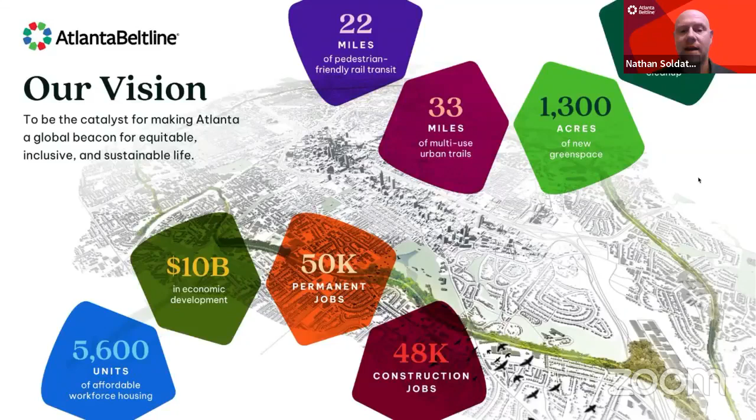So all these elements make up the Atlanta Beltline project. I'm glad you guys could take a quick walk with me along the Beltline and learn about the full portfolio project. But at this time, I would like to hand things over to Shaun Green. He's our principal engineer and also the project manager for the Beltline Transit Study. Mr. Green?

Thanks, Nate. Good evening, everybody. Thanks for joining us tonight. I want to give a brief overview of what it is that we're going to talk about, and then we'll get into some details specific to the Northwest, and then specific to the Southwest and Southeast as well.

Overall, the transit vision for the Atlanta Beltline is about creating equitable and sustainable solutions for access and mobility, transportation, as well as economics. So regardless of weather, regardless of wealth, regardless of geography, and regardless of ability, everybody will be able to make use of the Atlanta Beltline corridor with the transit program as we are envisioning it.

It adds to the already amazingly successful trail program that we have, and we'll be able to provide a lot more in the way of mobility for people that live on one side of town and are trying to get to the other side. So next slide, please.

The big picture here is our study area is looking at the Northwest, the Southwest, and the Southeast. The Northeast quadrant of the city had a transit study done by MARTA roughly 2 years ago. The purpose of what we're talking about tonight is to look at the balance of the Beltline loop, and to really focus in on the Northwest for the purposes of finding a viable, feasible, high-performing transit alignment between Bankhead and Lindbergh MARTA stations.

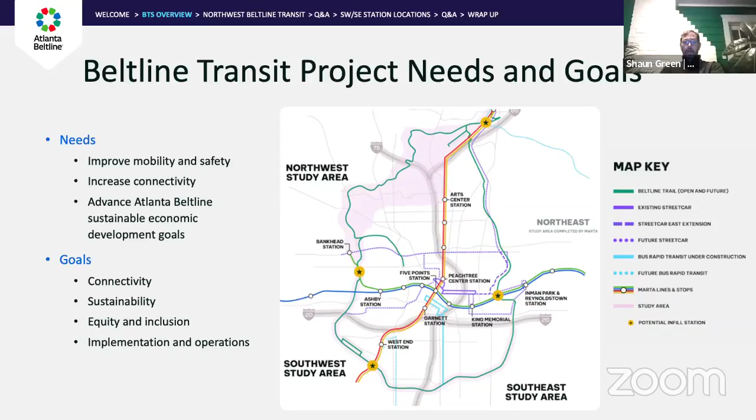Next slide, please. In the typical transit planning process, we are well into the preliminary planning element of it. We have the idea as to what we're trying to do. There's been a lot of work over the course of the last almost 20 years, but the last real deep dive in looking at the Beltline system-wide as a 22-mile loop was done about 12 years ago.

So it was time to dust that off and rethink through some of the assumptions. Really what we're doing with this alternatives analysis is we're trying to define the project in terms of what is the route, what is the alignment that's going to take, what are the stations that we're going to end up with. And then when we have all of that nailed down at the end of this process, we'll be able to hand MARTA a lot of deliverables, a lot of documentation, and then they can start to define the how, which is what happens with the design work that would follow before they get into construction and then operations and maintenance.

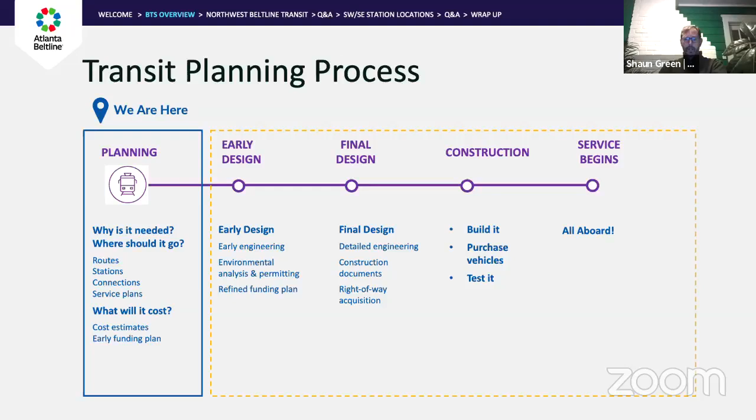So the next slide, please. Our partners in this, MARTA and the City of Atlanta, are working pretty tightly, not only in general, but also specific to this transit plan. MARTA is the transit plan implementer and operator for the City of Atlanta.

That hopefully is pretty apparent to everybody with the heavy rail and the bus system, and then the More MARTA program of projects, which is the half penny sales tax for 40 years. And then the city of Atlanta obviously stood up the Atlanta Beltline program of projects with our organization with enabling legislation in 2005. Currently, the city is the representing entity of the voters who are paying the sales tax for the MARTA high capacity transit projects that are envisioned. So on behalf of the city, Atlanta Beltline is the implementation agent.

And we have lots of other partners, as Nate mentioned as well. MARTA is our transit partner, just like Path Foundation is one of our trail partners, or Trees Atlanta is our arboretum partner, and we've got plenty of housing partners as well. So this falls well within the standard setup that we have for trying to get all of these programs that we are responsible for delivered through our partners and with our partners. Next slide, please.

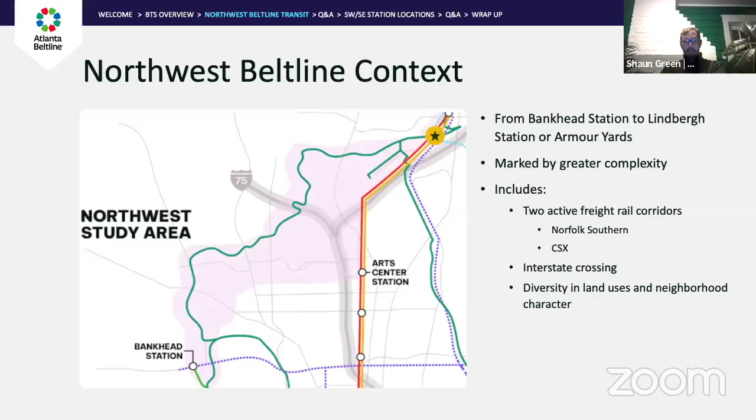Back to the goals - you can again see connectivity, sustainability, and equity. Those are the three outward-facing goals. And then we have our inward-facing goal with respect to operations and implementation. So ultimately, we are screening against these goals and objectives with some performance metrics that we'll talk about in the next couple of slides.

In terms of process, the Beltline was stood up in 2005. The last big look at transit Beltline-wide was in 2012. There'd been other work since done, but looking at it holistically and really digging into the Northwest to come up with viable alternatives. Ultimately, of those viable alternatives, one will float to the top and perform higher than the others - that's the one we're looking for as we go through these analyses. That one that floats to the top is probably going to be our locally preferred alignment, our locally preferred alternative, which can then be handed off to MARTA for starting up the NEPA environmental process.

NEPA is an acronym, it stands for National Environmental Policy Act. It's a federal umbrella law that incorporates all kinds of other environmental laws. It was signed in 1970. Basically, whenever the federal government spends federal money on projects, there has to be an environmental document that documents the process and decision making to get to the final conclusion. So we're in the alternatives analysis step right now, trying to get to an LPA, a locally preferred alternative, and then with that LPA, the environmental process will follow.

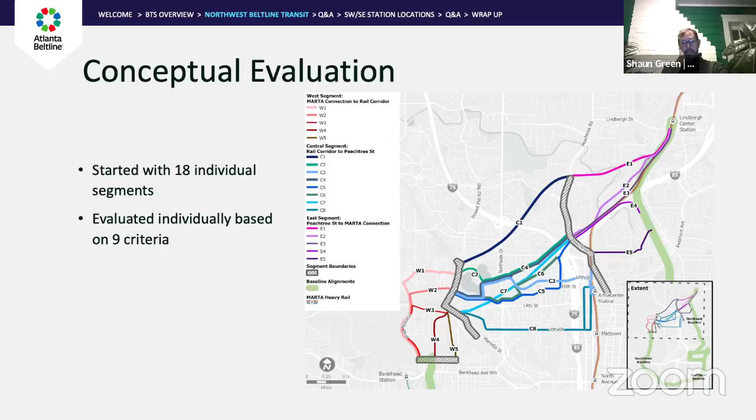And those 18 segments are all screened against a set of 9 criteria. We'll go through that on the next slide.

Engineering feasibility and right-of-way ownership get at the inward-facing goals of operability - I keep making up that word, but I'm going to keep using it, see if it sticks. We wanted to make sure that what we're coming up with makes sense and is physically possible to actually operate.

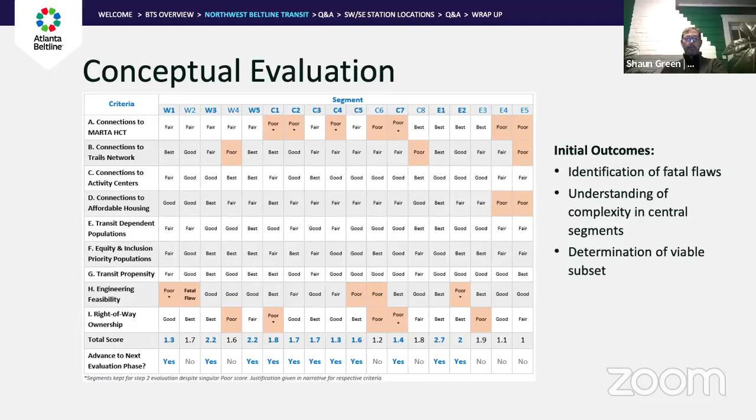You can see if you go to W2, the second segment at the top, and follow it down to engineering feasibility, there's a fatal flaw. The total grade change for a section of W2 was well beyond what any transit vehicle could achieve - making up a number, let's say it was like 18 to 20%, and the maximum grade vehicles can really do for even a short stretch is say 7 or 8%. So that segment was screened out because of that fatal flaw. We'll go through these with some maps over the next couple slides.

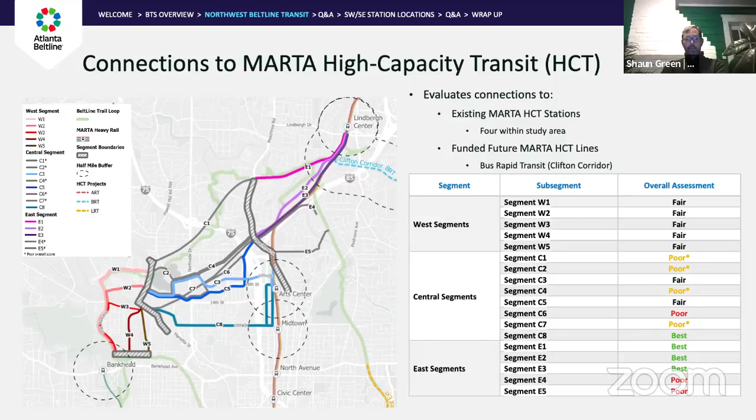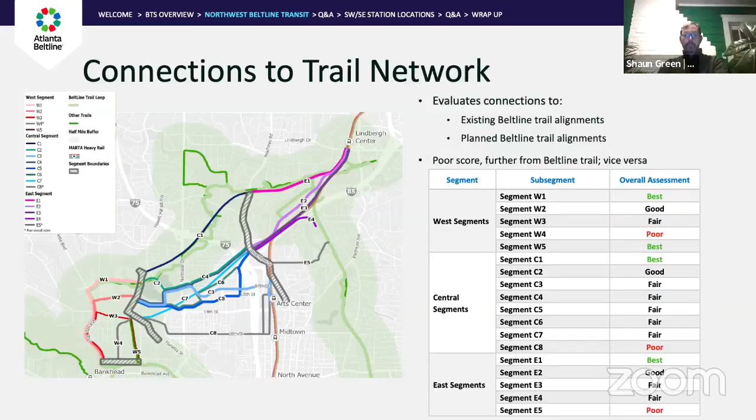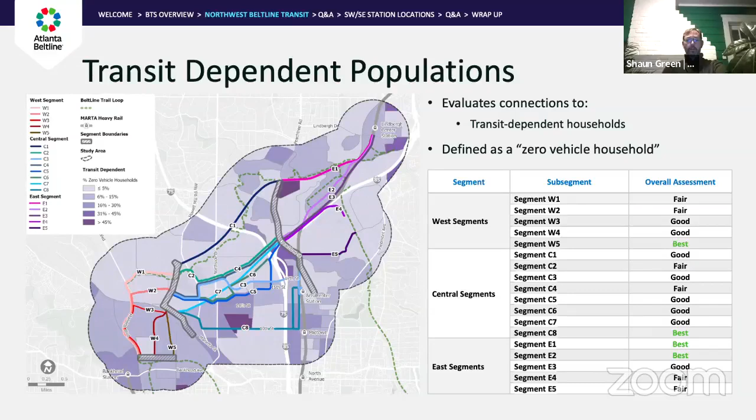Transit dependent populations, we define as 0 vehicle households, information gleaned from census data. The darker the purple within the study area represents a higher percentage of 0 vehicle households. The closer the transit segment is to the darker purple communities, the higher it scores than segments farther away.

Similarly, transit propensity is defined as a combination of low-income households and senior populations. In green, the darker it is, the higher percentage of low-income households, and the darker blue represents a higher percentage of population 65 and older. Where those overlap, the darkest color—a green gray—represents the highest percentage of population that is both low income and senior.

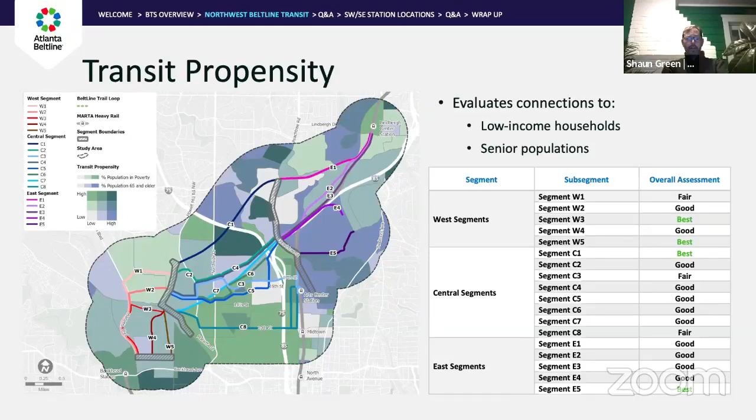So again, it's all about proximity. The transit segments closer to the darker areas within the study area score higher than the segments farther away.

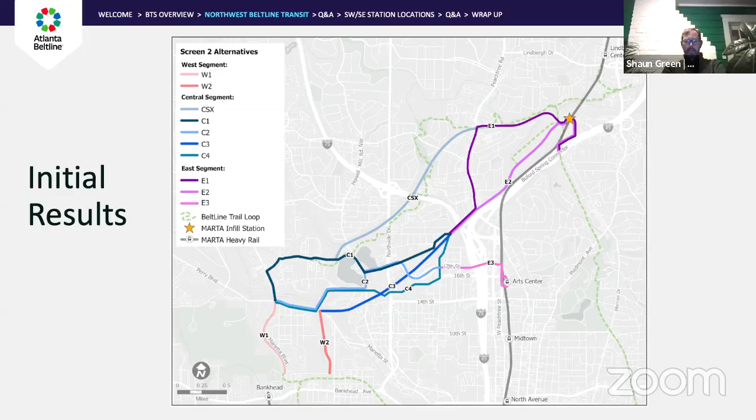From the segments that floated to the top in that first screen, we've taken those and turned them into continuous transit corridors that link up the Bankhead area to the Lindbergh area.

Alternative 1, the red line, generally follows the CSX corridor. The light blue and green alternatives come from the Norfolk Southern corridor, then get into the Peachtree Road corridor to go up towards the CSX corridor and continue east along CSX.

The purple and dark blue alternatives stay in the Norfolk Southern corridor and end up serving the Armour-Ottley area, making use of Norfolk Southern and some Georgia DOT right of way over there. That's a high level explanation of what these 5 corridor alternatives are set up to serve.

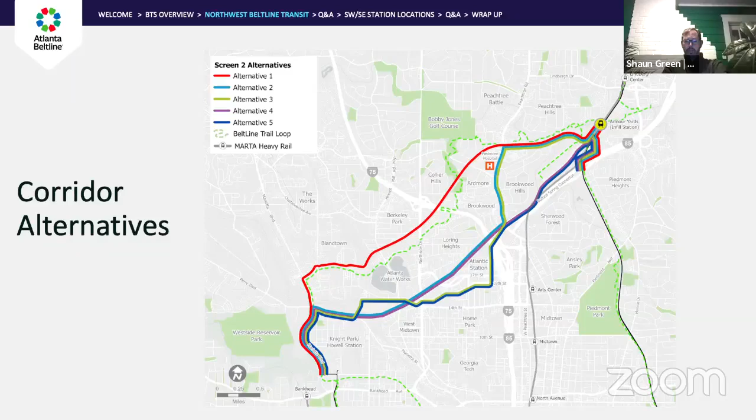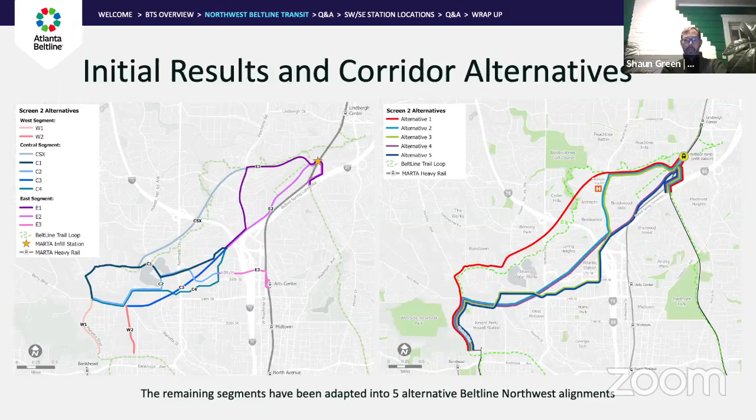You can see the initial results from the segment analyses and screening before, and how we turned those sections and segments into continuous corridors.

We came up with preliminary station locations for each alignment, based on existing zoning and future land use, with future land use getting at population and employment density. That future land use comes from the City of Atlanta Comprehensive Development Plan.

We also looked at social vulnerability, trying to ensure stations would be in close proximity to population centers with seniors, low income residents, or zero car households, while also wanting to be as adjacent as possible to activity centers and employment centers.

Piedmont Hospital, for example, is I think the largest employment center within the Beltline planning area, so that's a great target to try to serve with transit. Atlantic Station, as an activity, housing, and job center, is still probably only 60% built out with another 40% to go, so there's a lot of existing and future density there that makes sense to serve.

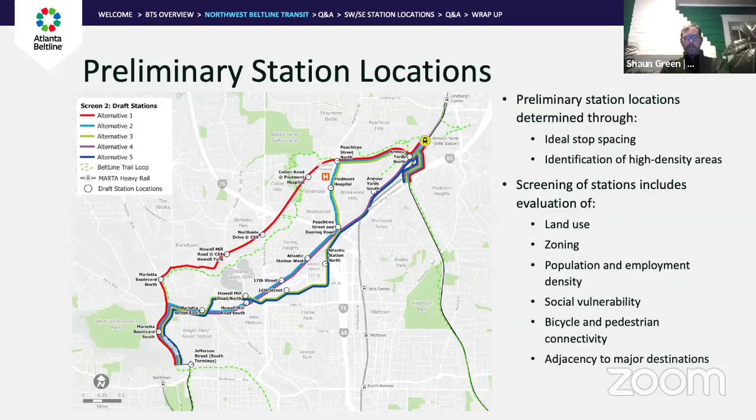There's a lot of very interesting analyses we've got going on right now, trying to sort out which corridors perform higher than others. That's an ongoing set of analyses we'll be able to report out on at the beginning of the coming year.

So what's next for the Northwest? If we can hit that next slide.

Ultimately, what we're doing is we're doing the analyses for the stations to see how they're performing in terms of ridership. We're going to be looking from a corridor perspective at the capital and operation and maintenance costs. We'll also be looking at the corridor level in terms of environmental impacts, whether it's ecological, social, or cultural. We'll be looking at those at a high level as well.

And then where we do have in-street running, we'll look at what kind of transportation impacts we will have on the existing system. Each one of these 5 alignments would be a great alignment for transit within the city.

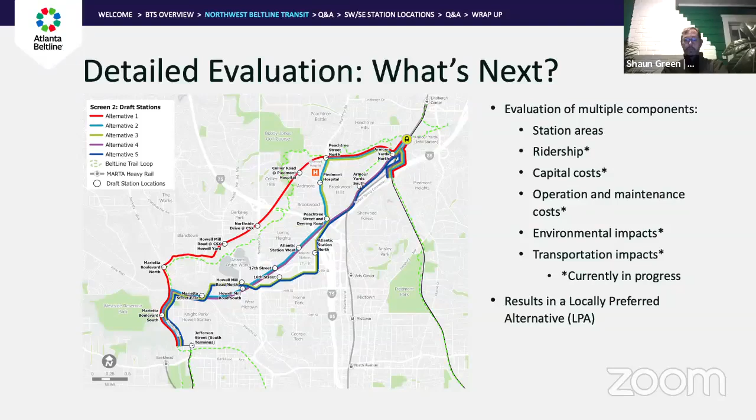We're really only going to be able to pick one of them. So we, as a collective city, are going to have to make some decisions with the data sets that we're providing at the end of this study and ultimately pick a locally preferred alternative for the Northwest.

So with that, we'll go into the Mentimeter, which is a survey tool. So if you're on a laptop and you have your phone, you can grab a QR code here and get into the Mentimeter website.

If you just want to use your laptop or your phone without the QR code, you can go to menti.com and enter the code 5968843. That will link you into this Beltline meeting in terms of the Mentimeter code, because we've got a couple polling questions that we want to ask.

And so here comes the first question. Dun dun dun. And I apologize, folks, I'm fighting a cold, so I'll be drinking a lot of water tonight to keep the voice going.

So this is a prioritizing question. Basically, the question is, what criteria or factors are most important when considering alignments or routes and station locations for transit? So what we want you to do is rank these 7 by importance. Your most important would be moved to the top, and your least important of the 7 moves to the bottom. We'll give you guys a couple minutes to think about this and organize your thoughts.

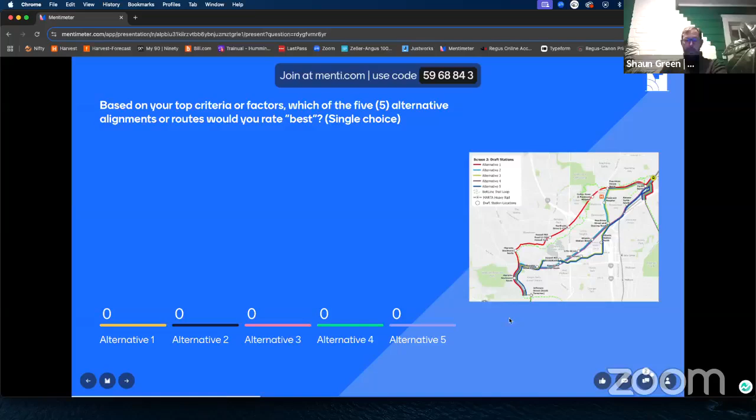Sorry, the colors in Menti don't line up with the colors on our map. Alex, if you can go back into the slide deck and share the last map in the Northwest.

That way it's a little bit bigger and everybody can take a look at it. But I'll need your help, Alex, because if that map is up on the screen, I can't see the Menti. Well, maybe I can find it on my phone.

So alignment or alternative one is the red alternative. That's generally CSX. The other alternatives are generally using Norfolk Southern, and in addition, alternative three and alternative two are also using Peachtree Road, Peachtree Street, Peachtree Road.

And then alternatives four and five follow Norfolk Southern all the way through Armour Ottley up towards Lindbergh.

Alex, if you don't mind, can you tell me how many people have voted in the Menti? I don't want to submit and skew anything.

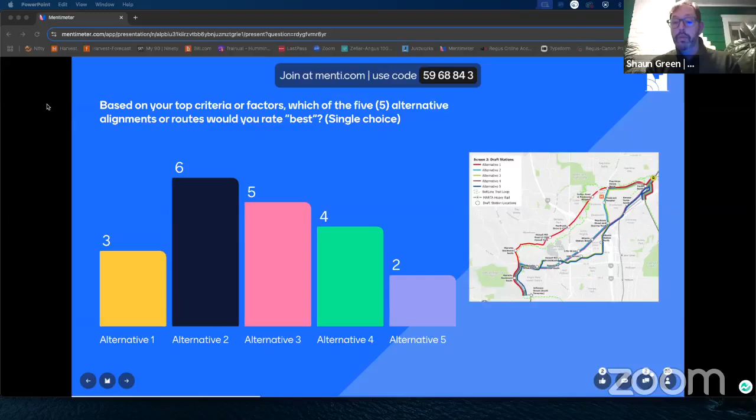Oh good, so we got 20 participants there. So what we have is three people with alternative one, the CSX corridor, six people with alternative two, which is the light blue corridor that runs Norfolk Southern and Peachtree. Then we've got five people looking at the third alternative, four people looking at alternative four, and two people looking at alternative five.

So I think that's 20 out of 30, 29. Yeah, I think we'll call that close enough in terms of a percentage of the population that participated, and move on. Is there another Menti or are we going back to the presentation?

Excellent. So what we're going to do right now is a section of Q&A specific to the Northwest, while it's kind of fresh in your head.

You can go ahead, Nate. Yeah, Shaun, I got this. Why don't you grab a drink? I think you've given this presentation four times already this week. So today, all right, we're going to break things up a little bit.

So we're going to address a few questions. We have a nice small group, we have some folks on Zoom. I'm thinking if we have any phone attendees at this time, but we do have Facebook Live.

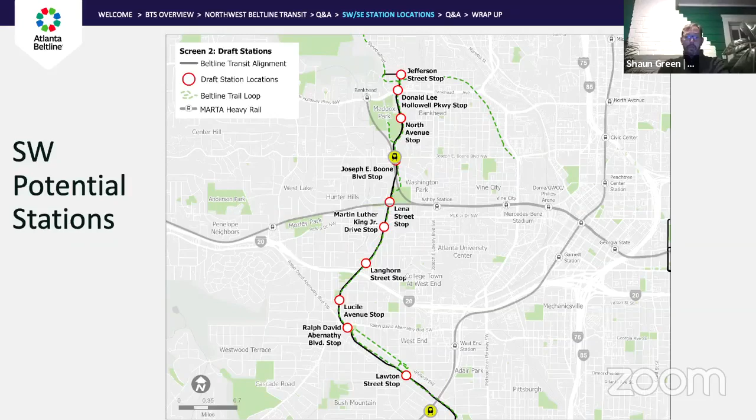On the next slide we have the Southwest potential stations. You can see there's a lot of them.

When you're laying out transit 10, 12, 15 years ago, the conventional wisdom at the time was to make it as accessible as possible—put as many stations in so people can walk up to it. The problem is if you're trying to go a distance on that train, you end up having a stop every quarter of a mile, so your travel time ends up being long as a result. So what we've done here is challenge that conventional wisdom and started looking at whether we really need all of these stations.

Next slide please. We'll go through some maps here for the Southwest and Southeast looking at those performance metrics that were just in that table. This map here is showing proximity to affordable housing.

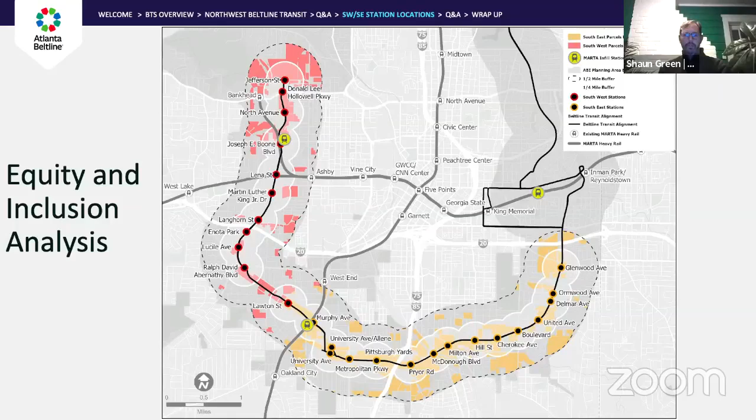The difference in color here is just to differentiate southwest from southeast. The red pink color is the southwest quadrant, and the orange tan color is the southeast. But that's the only differentiation.

This is a map showing the existing MARTA system. You can see the north-south red gold lines running up and down on the screen, and the blue green lines running left, right, east, west through the screen. Those are the existing MARTA subway. And then there's the proposals from the More MARTA program for other high capacity transit.

You can see the Campbellton Road bus rapid transit proposal in the bottom left as the dashed blue line. The dashed blue line in the middle of the map is the MARTA Summerhill BRT, bus rapid transit, which is under construction now. That runs from downtown down Hank Aaron, past the Georgia State football stadium, down to the McDonough Boulevard location in South Atlanta. The dashed red line is the proposed arterial rapid transit along Metropolitan Parkway.

Bus rapid transit, well, maybe the way to explain it: local bus has bus stops every 2 or 3 blocks. Arterial rapid transit is an enhanced local bus trying to improve upon travel time by limiting the number of stops. So instead of stopping every block or three, it has a larger spacing between stop locations to try to reduce the number of stops and reduce overall travel time.

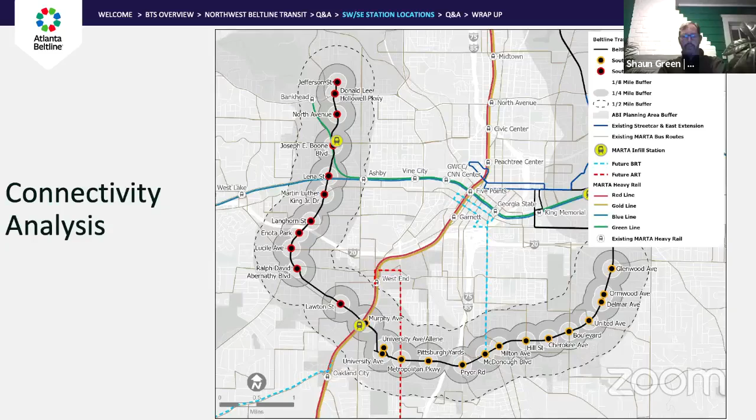Bus rapid transit has stations that are even farther apart. It's basically set up to mimic a light rail streetcar type of operation, done on rubber tires on asphalt, trying to get as much dedicated lane as possible. Again, all trying to get at the most limited travel time, because usually those are on pretty big distance runs. So the closer the stations are to those high capacity transit projects and corridors, the higher the score; the farther away, the lower the score.

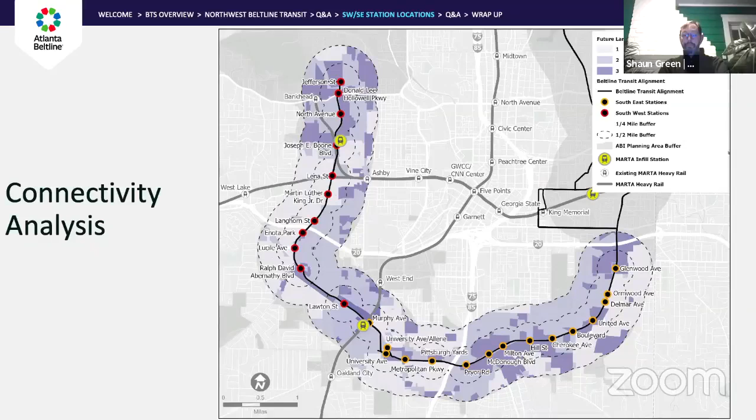This here is looking at travel sheds. We've got the quarter-mile and half-mile buffers around the stations, regardless of how you do it, it's just a physical distance.

One of the other things we did was look at how far you'd have to go if you're trying to get there on bike, within a mile and a half, what does that station coverage look like? That's what the purple is. The darker the purple is just the overlap of multiple stations that have a similar capture area. But the outside of the purple is that mile and a half bike shed. That's really getting at, and I guess I should have explained this earlier...

The half-mile station buffer is really there as kind of a proxy for how much time it takes to get to the station. Usually people can walk about a half mile in about 10 minutes, and the mile and a half bike distance is about a 10-12 minute bike ride as well. So that just gives you a sense.

Now, what we've done with the analysis is we had 7 stations of the 12 that we looked at that kind of floated to the top, based upon spacing, based upon activity, based upon all those metrics we just went through.

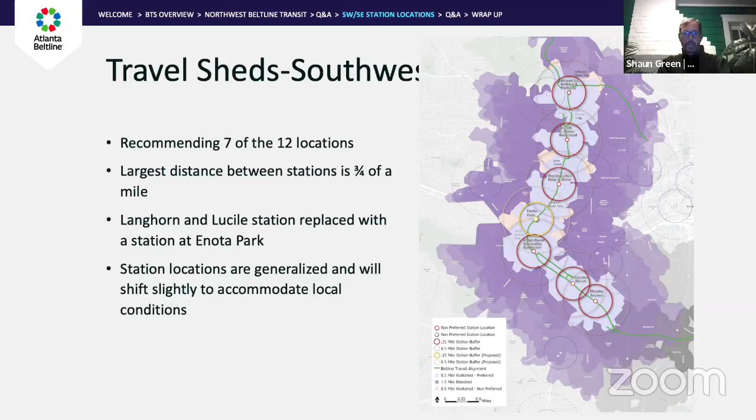On the next slide, we have the Southeast, and we also found 7 stations here that floated to the top. The largest distance you can see is on the right side with Boulevard and Glenwood Park. Again, those are half-mile circles, so they're about a mile apart.

We've already received some feedback that that's just too far. So we're looking at whether United Avenue makes sense as a stop location. That's maybe a third of a mile away from Boulevard, right at the edge of that quarter-mile buffer. So we're looking at that to see if it makes sense to add a station there based upon that feedback.

But there's really not much in the way of density in between, other than the Trestle Tree Apartments at United. That's about 13 acres. They've got some tax abatements that continue for another year or three. But at some point, maybe that becomes an opportunity to densify and redevelop.

Add additional affordable and market rate housing, maybe some commercial there. And if something like that is present, then it probably does make sense to add another station location in that vicinity. So we're doing a little bit more looking at that. But you can see these 7 locations here.

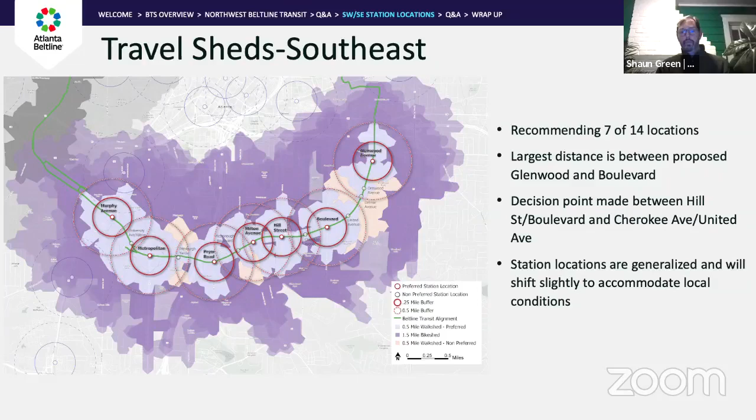The next map will show a lot cleaner what we're looking at in the Southwest. So if you start at the top and work down, we're looking at a station in the vicinity of Donald Lee Hollowell Parkway, just down from the Bankhead MARTA station, just east.

And then we're looking at a transit station for Beltline Transit at Joe Boone. This is a location where we would have a connection with the MARTA heavy rail. It would be an infill station halfway between the Ashby station and the Bankhead station. But where the Beltline and MARTA are effectively collinear here, it really makes sense to make that connection at that location.

There'd be another station at MLK Jr., another one down south of 20 at Enota Park in the Westview community. The Ralph David Abernathy Boulevard stop is in the vicinity of Gordon White Park and the Kroger City Center that's there. And then there'd be a proposed stop at Lawton Street before you get down to a proposed stop at Murphy Avenue.

And again, Murphy Avenue is one of those infill station locations. It would be a new MARTA station on the existing MARTA track between the existing West End station and the Oakland City station. So the intention is to open up additional access to the MARTA heavy rail system and provide a lot more access for the community that's there and the community that's coming.

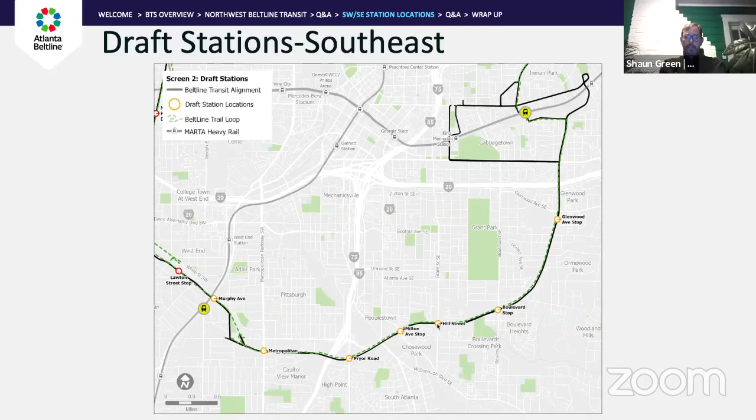And calling it Milton Avenue may not do it all the justice that it deserves. It'll be somewhere between Hank Aaron and Milton, McDonough Boulevard, with the turnaround and the end of line of the MARTA Summerhill BRT, plus the roughly 40 feet of vertical grade separation between the street at Hank Aaron and the Beltline corridor down at the bottom there. There's going to be a pretty big ramp system.

So even though Milton's at grade, with that crossing, the station there is probably going to slide away from Milton and towards the ramp system, to try to make that transfer as easy and clean as possible between Beltline Transit and the MARTA Summerhill BRT.

East of Milton is Hill Street, and then up to Boulevard, and then up to Glenwood. We're going to be looking at what we need to see at United to make sense of having a station installed. The next slide shows all of Southwest and Southeast, so you can get a sense of cadence and spatial relationship of the different station locations.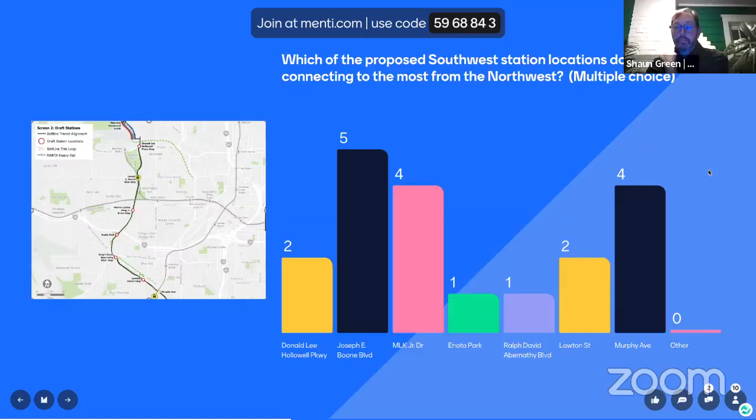We've got 8 responses, 23 attendees, so we're at 10, 12 - about half. With about half of our attendees participating in this poll, Joe Boone is coming in with the highest, followed by Murphy Avenue, and then MLK. Everything else has 1 or 2 votes. Thank you for that.

Next question on the Menti, please. Which of the proposed Southeast station locations do you envision connecting to the most from, let's say, the Southwest?

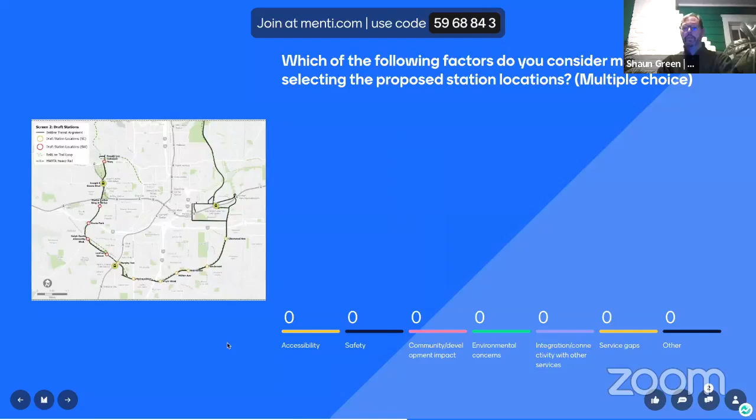Is there one more? Which of the following factors do you consider most critical in selecting the proposed station locations? This is accessibility, safety, community development impact, environmental concerns, integration and connectivity with other services, service gaps, or other.

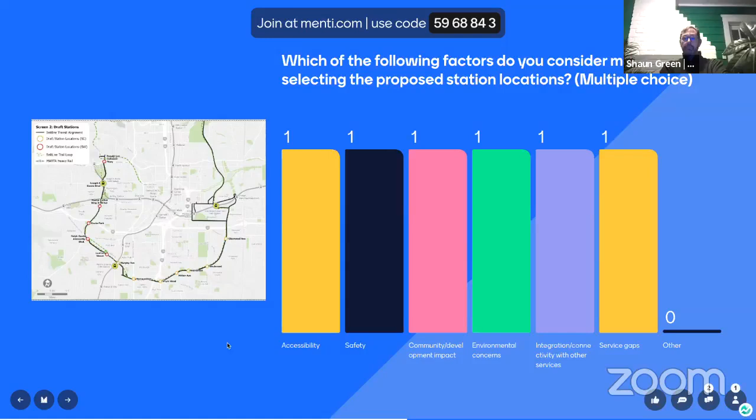So we had one person vote for all of them except other. That's awesome.

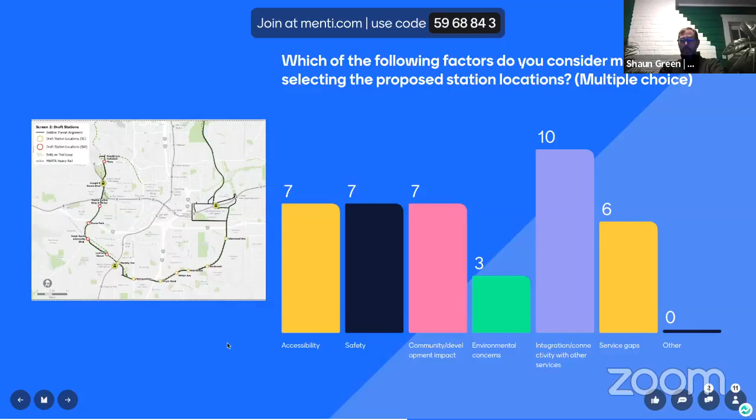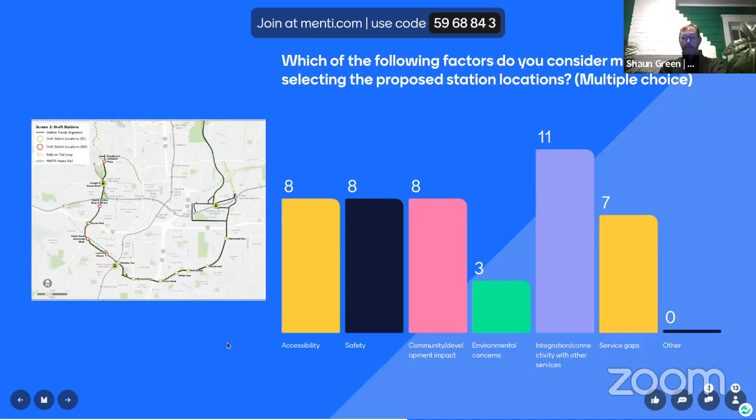6, 7, 8, 9, 10, 11 - so that's right where there's 12, just proud of half, 13, sweet. Integration and connectivity with other services got 11 votes. Accessibility, safety, and community development all got 8. Service gaps got 7, and environmental concerns got 3. Thanks for the feedback, appreciate that.

And I guess this is the last question: based on the proposed stations, do you observe any gaps in service or accessibility? If so, which areas, and do you suggest any alternatives?